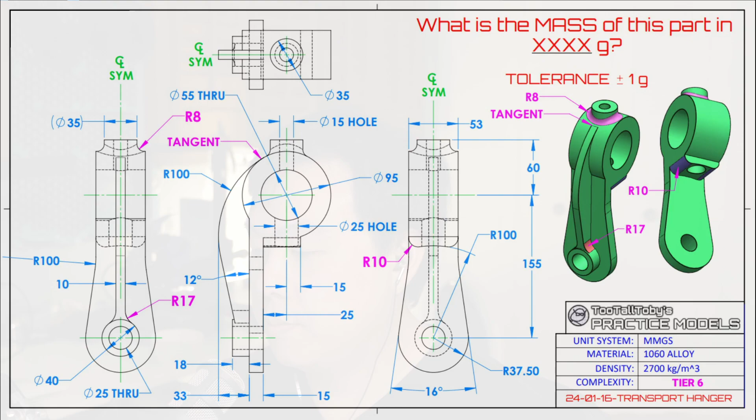Today we'll be modeling Too Tall Toby's 240116, the transport hanger. And like always, we'll take a look at the diagram and decide on a plan before we get started. So let's jump into the diagram.

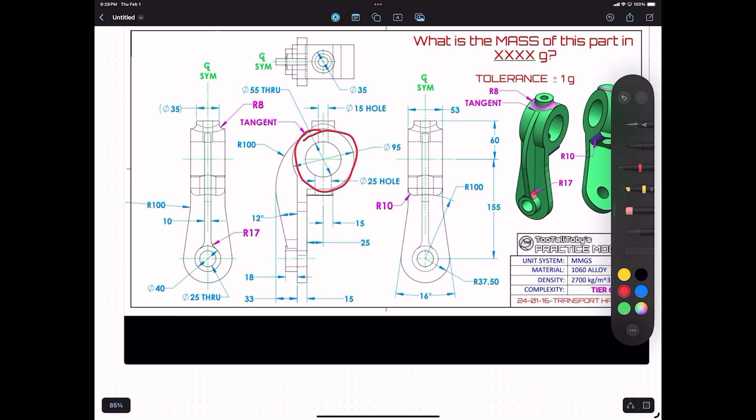So looking at the drawing, basically there are two profiles that we're going to be working with. We're going to be working with a side profile, and then we're going to be working with a front profile. So to start things off, how I did this model is I worked on the side profile and I modeled out this cylindrical shape. Afterwards, I would extrude it and then switch to the front profile to model out this bottom piece over here.

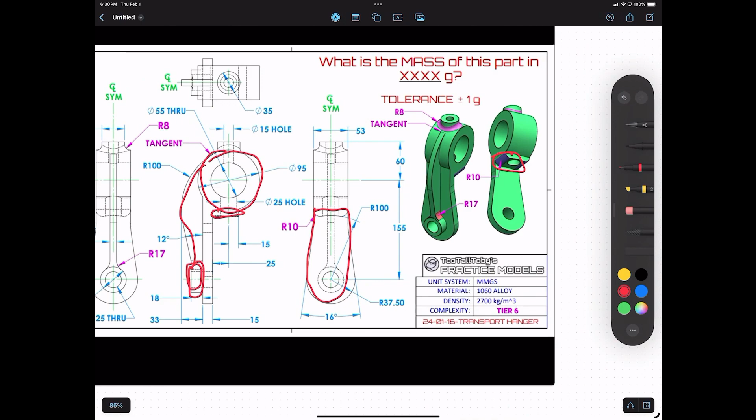Next, I would then model out this cylinder piece with the hole. Then I would do the fin. Afterwards, I would model out this chin from the front. So like over here, this chin over here. Then I would do the top, and then the hole through the top, and then similarly a hole through this piece over here. And that's pretty much the approach that I took to model this piece.

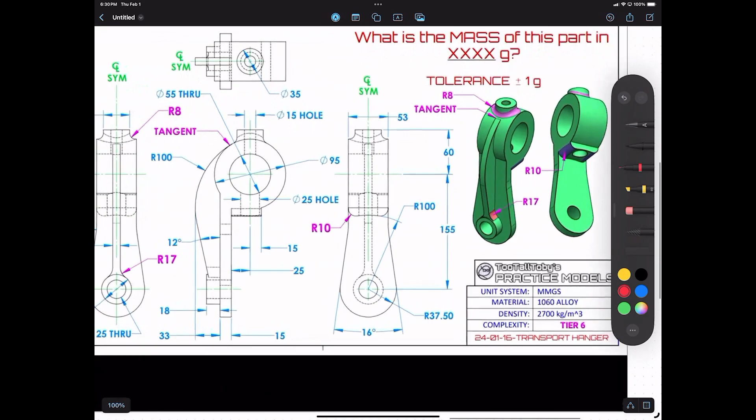One thing to note, however, it's pretty important to figure out what the origin will be. And so for this model, I used this circle over here, this point over here, as the point of origin, because if you can see from the drawing, there's a lot of things that are relative to this origin. So here you can see that there's a 60 millimeter offset relative to that origin, and then there's also this 155 millimeter offset that's also relative to the origin. So yeah, without further ado, let's get started in the software.

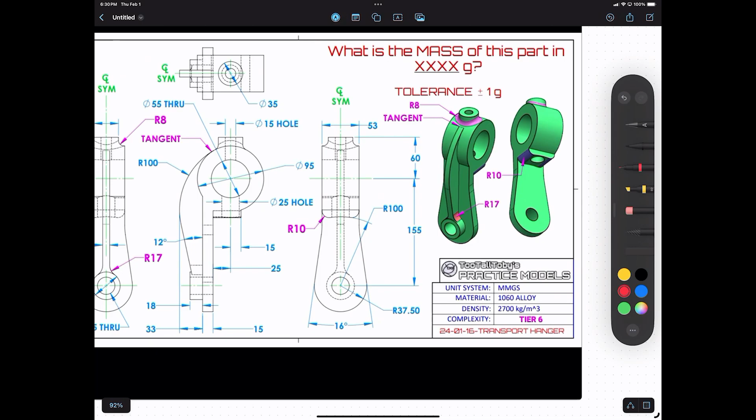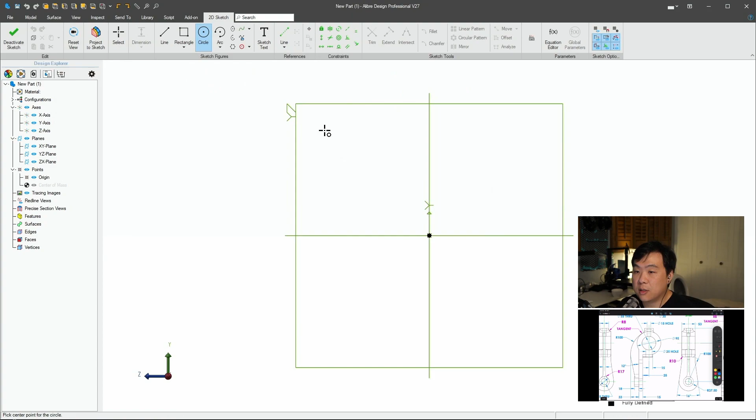So in Alibre, like I mentioned, the first thing I'm going to do is switch to the side profile. So I'm going to rotate the camera to the right. I'm going to create a new sketch on this YZ plane. For the circle, I'm going to use this circle tool. And from the origin, it says that there's a diameter of 95. So I'm going to enter in 95. And there's also this 55 millimeter through hole. So I'm going to use the circle tool again. And from the center, I click and then enter in 55. And I'm done with my sketch.

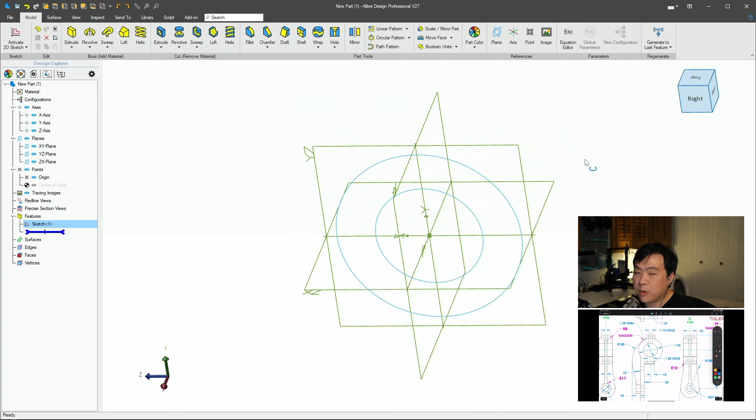From here, I'll go to the extrude tool. And for the type, I'm going to select mid-plane. And I'm going to enter in 53 as the depth and click OK.

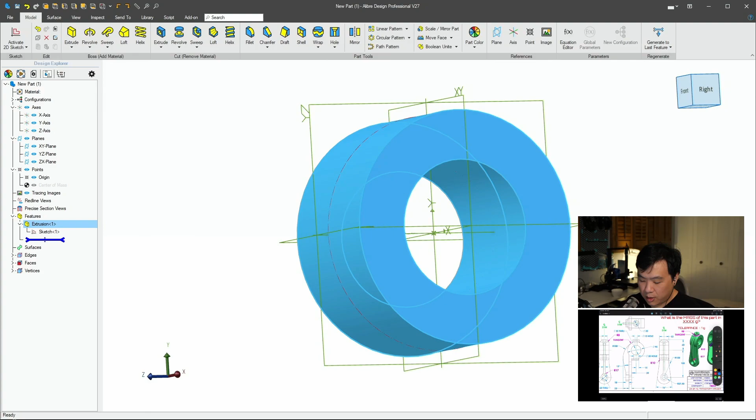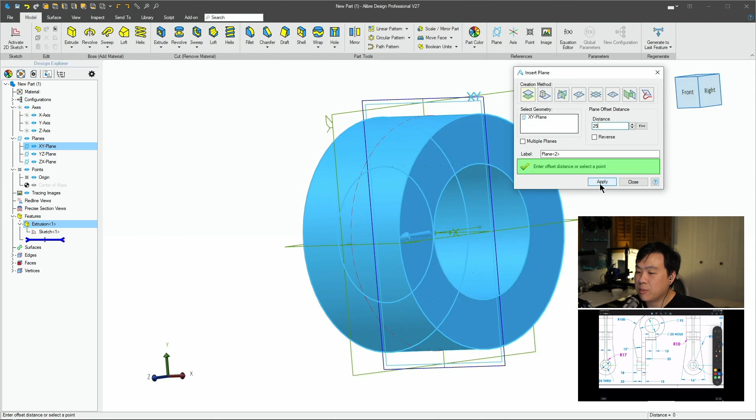Next thing that I'll do is I'm going to model things from the front view. But in order to do that, we need to create a plane that is offset to the correct position to model that piece. So here I'm going to use the plane tool. And for insert a plane, I am going to select the XY plane to be relative off of. And for the distance, I'm going to enter in 25 and then press apply. I'm going to close out of that, and now I can create a sketch on this plane. So from here, first thing I'm going to do is project this face, create a reference figure, and maintain association. So that's something for me to reference.

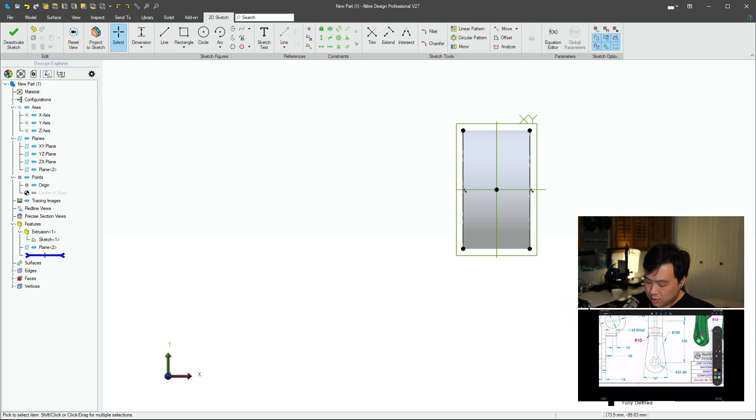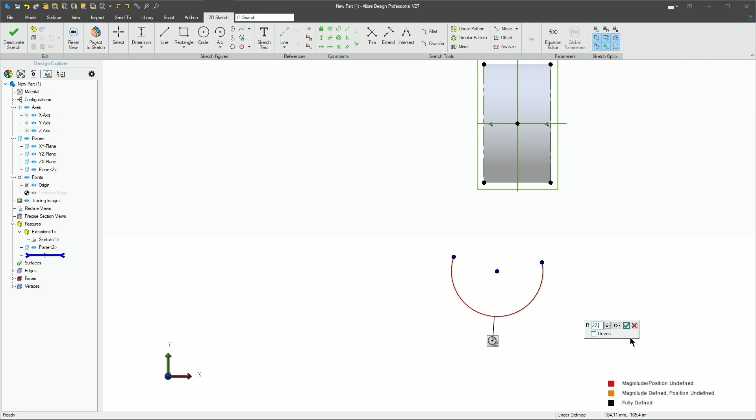And here, from the front profile, I need to create an arc. So here it says there's an arc with a radius of 37.5. So using the arc tool, I'm just going to select anywhere for now, create that arc first, and then add the dimensions in. So I'm going to use the dimension tool. For the radius, I'm going to specify 37.5. I'm going to make it so it is vertically aligned with the center of the existing model. So using the vertical constraint, I click on the center over there and then the center of our arc, and now it's vertically aligned.

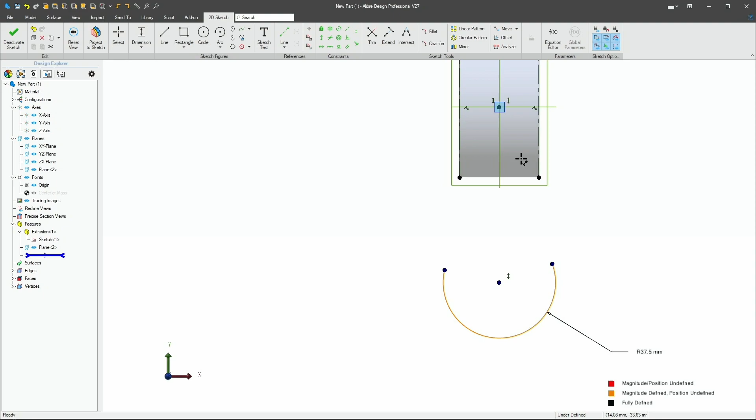Actually, before I draw, I can also add the distance between the center of the existing piece to the center of this arc. So using the dimension command, I click on those two centers, and add in 155 millimeters as the distance. Now I'm actually going to go in and draw in the remaining shape. So using the line tool, I can click on one side, click over here, and then notice how it goes up.

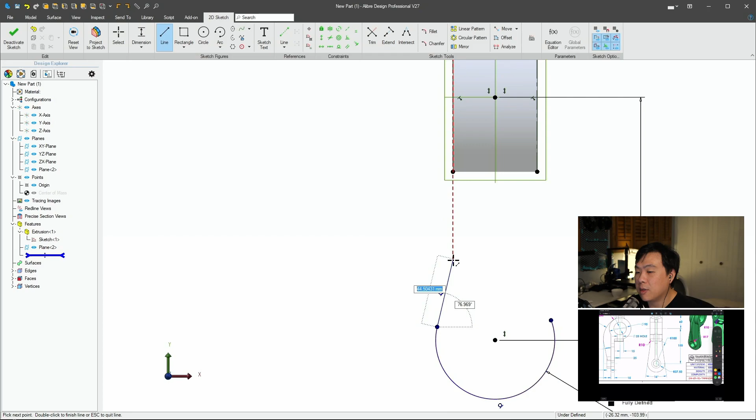I will add the tangent constraint in a bit, or if I'm careful enough, you can see that on the screen there's already a tangent constraint that's added for me if I'm careful with the way I'm drawing things. With the line tool, if I'm careful enough, it automatically adds that tangent constraint for me, which is what I want. You can see it's adding the tangent constraint, but then it also gives me this dotted line.

This automatically shows that if I add the point here, it will be right at the intersection at which a vertical line can be drawn to the existing model, and it will be exactly vertical, which is what I want. So I want the tangent constraint as well as this dotted line to appear. I'm gonna click on that once.

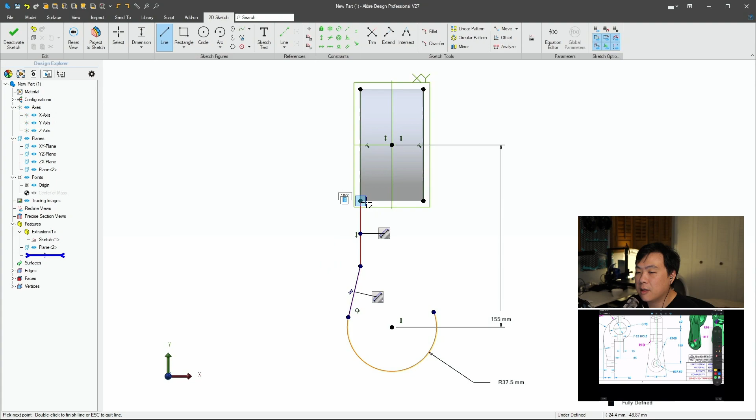I can draw up to this point over here and click again, go across, go back down, and if I'm careful enough, I can make it so, let's see. It's okay. Make sure that it's parallel, and then I can draw to this to complete the sketch. So using the horizontal constraint, we want to make sure things are mirrored. So I'm going to select this left side and this right side, make sure they're horizontal, and then using the tangent constraint, I'm going to select the curve and then the line, make sure they're tangent.

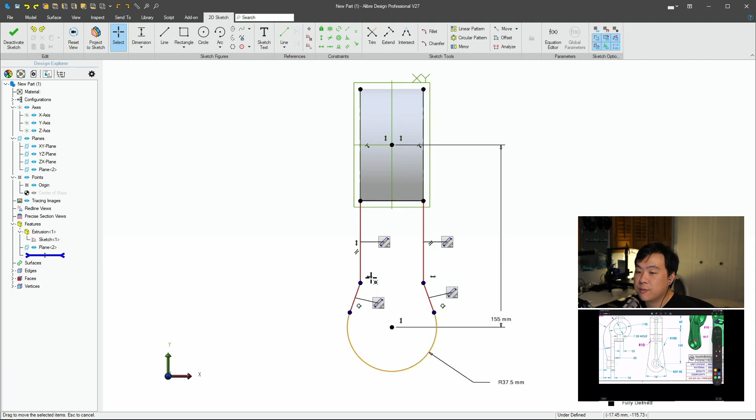And let's see what else is there to do. To make sure that the curves are symmetrical, I'm going to undo that again. I'm going to use the horizontal constraint, click on one point of the curve and click on the other. Oh, it's already over-constrained. Let's see what else can move right now. So it looks like the distance of this line can move, and that's because we haven't specified the angle between the two lines over here.

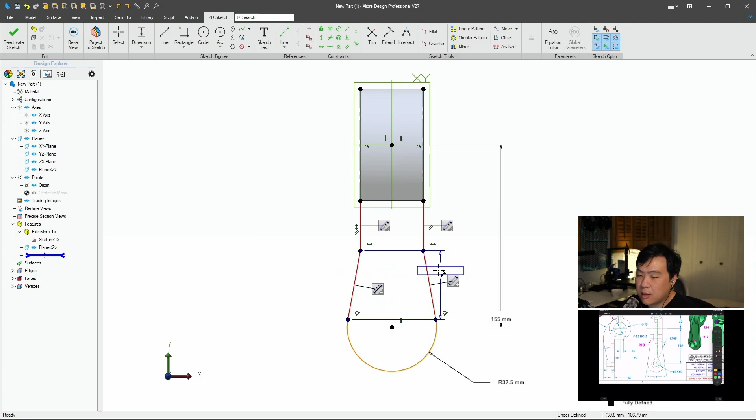So using the dimension tool, I click on one line and then click on the other. Try that again, click on one line, then click on the other. And I can specify that 16-degree angle that's needed, and now everything is fully constrained. So if I deactivate the sketch, I can now extrude. For the depth, according to the drawing, it's going to be 15 millimeters. Click OK.

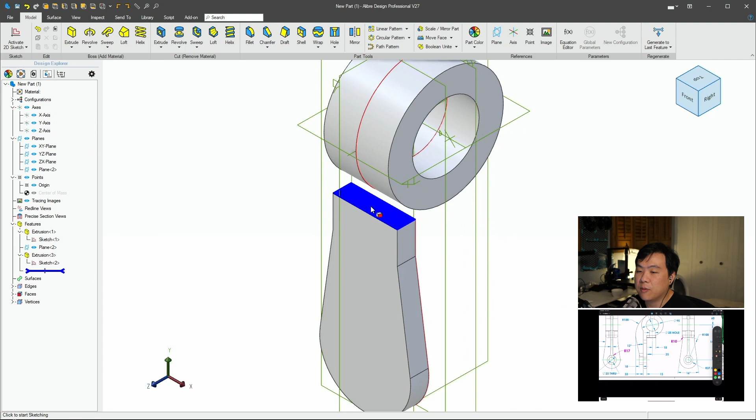Now, the two solids are kind of disjoint right now. So in order to connect the two, I'm going to create a new sketch on top of this face of the second piece that we created. And I'm going to rotate around. I'm going to use the project to sketch and project that face. I want to keep everything from that face, so I'm just going to use the create sketch figure option and maintain association with source entity.

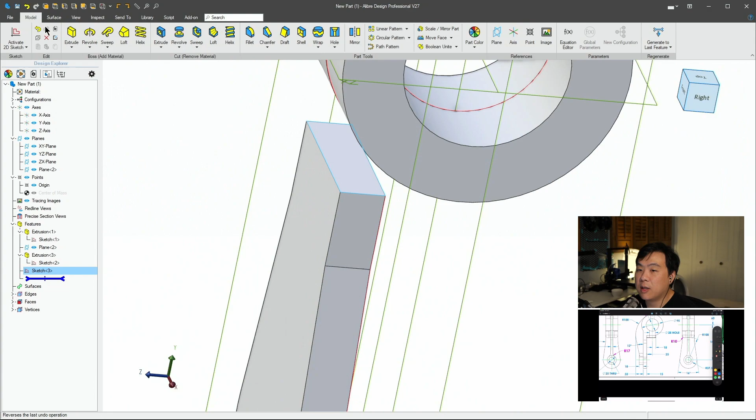And then right away I can deactivate the sketch and use the extrude command. With extrude, I can change the type to geometry and then select the piece that I wanted to extrude to, and then click OK. Perfect. Now, rotating over onto this side, we're going to create that cylinder with the hole. So I'm going to create another sketch on this face now.

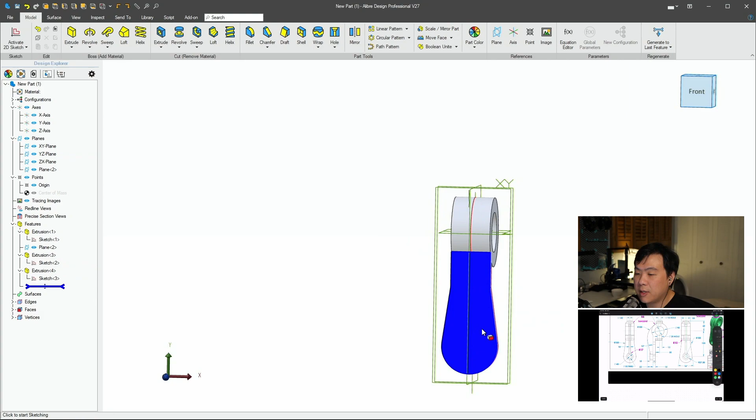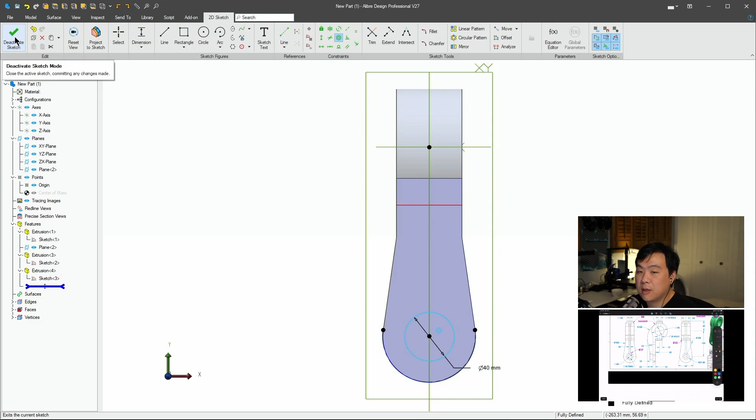And then here, I'm just going to use the circle tool to create a circle and specify the diameter of 40. I'm now going to use the concentric constraint so that the center of this arc over here and the center of this circle are the same. Selecting the concentric constraint, I click on this arc and then click on the circle that we created, and now it's fully defined. I can now deactivate the sketch, use the extrude tool, and specify 18 millimeters as the depth.

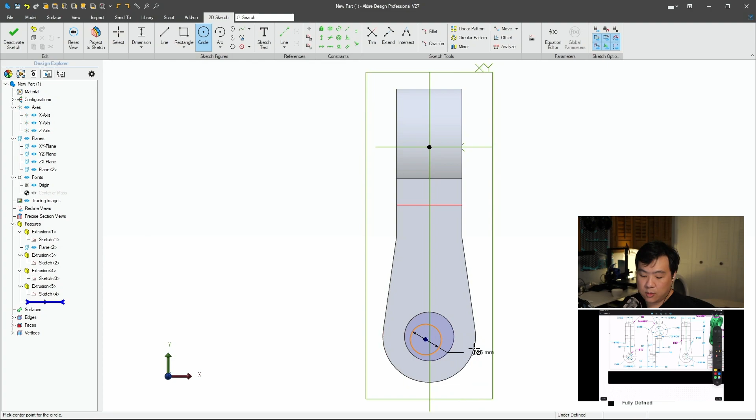Now creating another sketch on top of this new face, I can use the circle tool again and specify the hole that we want is 25 millimeters. Once again, using the concentric constraint, click on the circle, click on the outer circle, and now that it's aligned, I'm going to deactivate the sketch, and then use an extrude cut and select the type to be through all. Click OK.

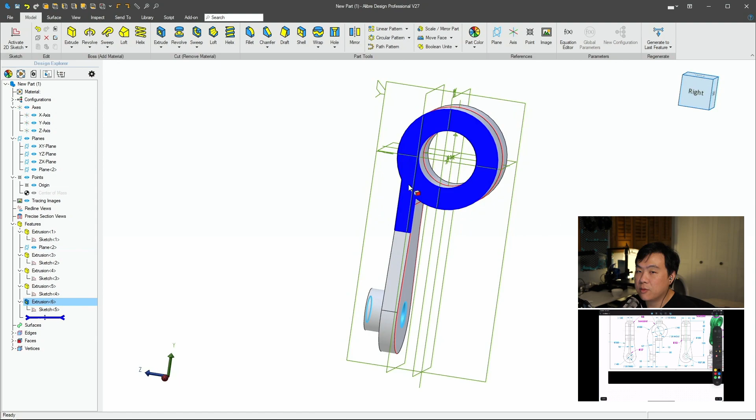Next thing I'm going to do is I'm going to model this fin. So in order to do that, I'm going to go back into a side profile. So I'm going to create a sketch on top of this YZ plane, and that'll bring me to the side profile. And I'm going to project in a couple of things that I need to reference.

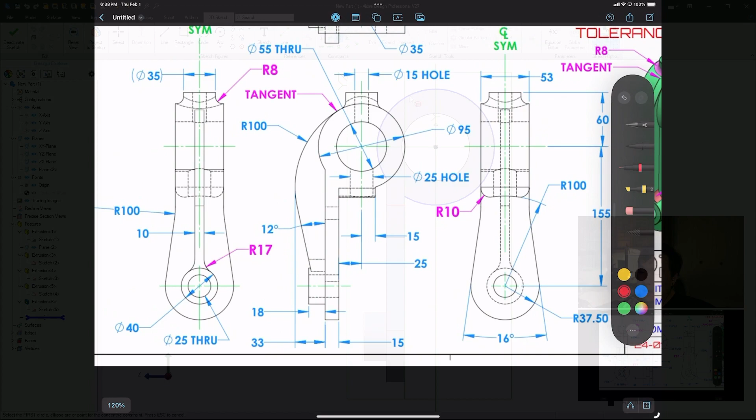So from the drawing, it says that I will need an arc, and that arc needs to be tangent to this outer circle. And likewise, it also gives me another dimension where from, I guess, the bottom of this, let's just call it leg, there is a 33 millimeter distance to a line that runs vertically, and that vertical line is just going to be a reference line, but our arc needs to be tangent to that as well. So that's what we'll do.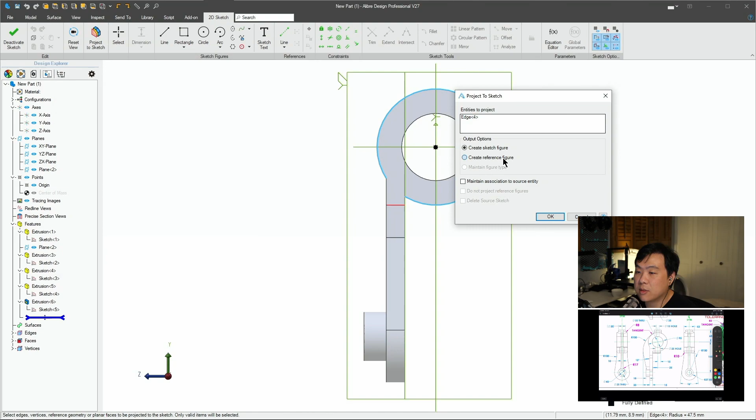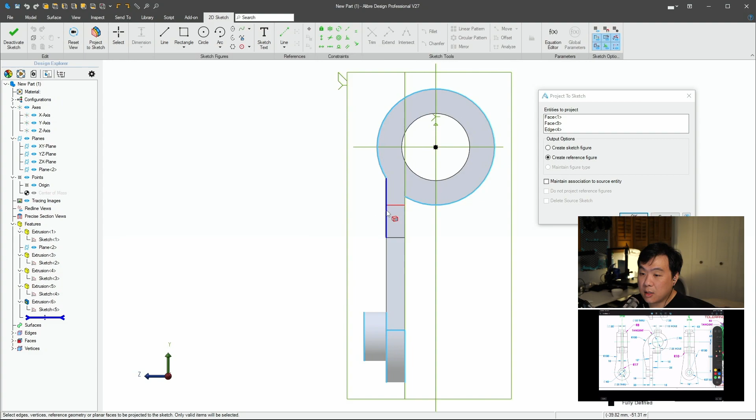So I'm going to use project to sketch. I'm going to project this curve that we need, and again, I want it to create reference figures. We know that we need this face because we need to create a reference line that's 33 millimeters away. So we'll select that face. Let's see. We probably will need this face as well because the arc needs to intersect with the cylinder. That might be all that we need.

But let's also project in these two edges so that when we close off the profile, we can make sure that it's aligned to these two edges. And then we want to maintain association and then click OK.

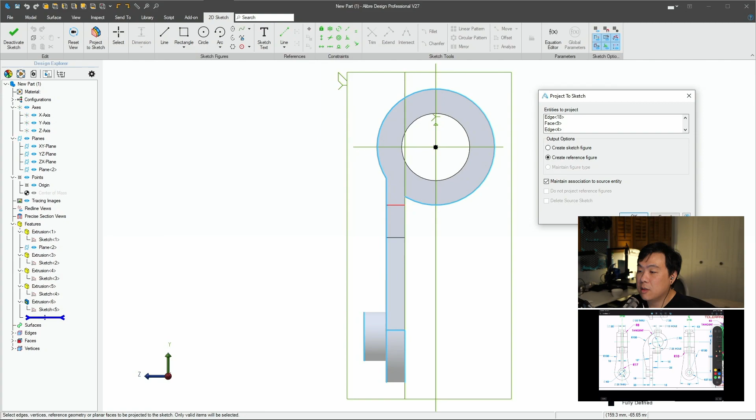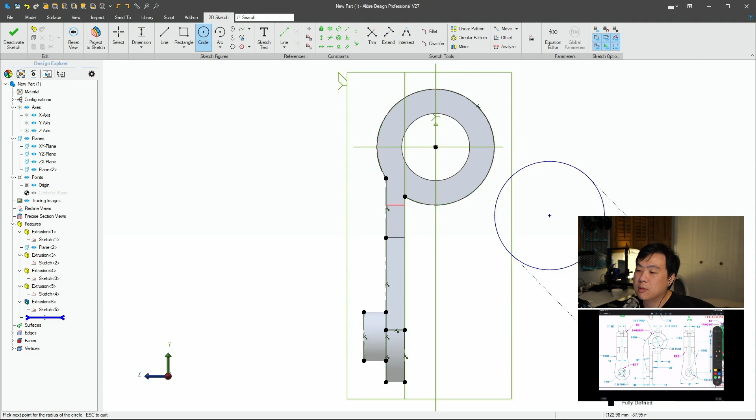So there's two ways to do this arc. We can actually use the arc tool, or I'm going to use a circle. I found that the circle works better. So I'm just going to create a circle first. And it says that the radius of this arc is 100, which means that the diameter of the circle must be 200. I'm going to specify 200 and click OK. Now using the tangent constraint, I'm going to click on the circle and then click on the curve that we projected in. And now it's aligned over here.

Now using the line tool, from the bottom of this, let's call it leg, I'm going to drag it outwards, and enter, making sure it's 180 degrees, and enter in 33 millimeters as the offset. Oops. Pressed the wrong button. Sorry. Let me do that again. 33 millimeters, and make sure this is 180, and then press OK. And get out of that.

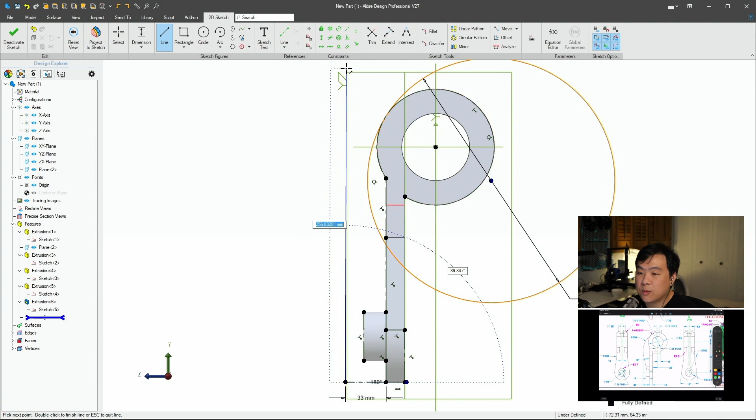So here, I'm just going to right-click on this line and then convert to reference figure. I'm going to draw another line that's vertically upwards, making sure that the degree is 90. I'm just going to draw arbitrary length, tab over, making sure it's 90, and then press Enter to confirm, and then Escape to get out of that, and then also right-click on this line and convert it to reference figure. So now going with the tangent constraint again, I'm going to click on the circle and then click on this reference line that we created.

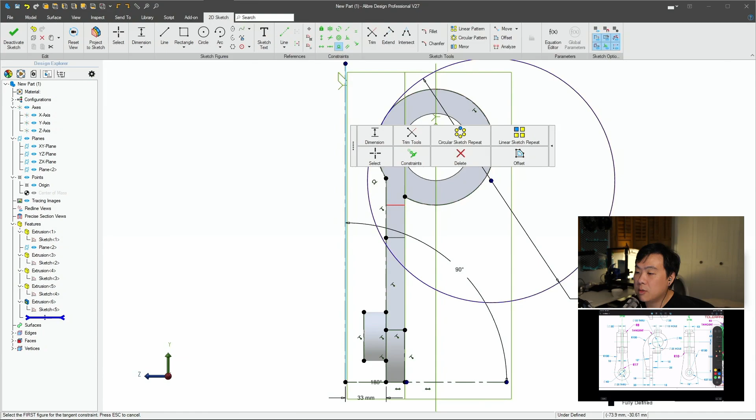And it says unable to determine. Let me see. Why is that? 33 millimeters. Can I move this around? It's tangent to this curve. Why isn't it allowing me to? There we go. So I must have clicked on the axis or the plane instead of the line. But now I applied the tangent constraint to the circle and then also this line. And now notice that the circle is fully constrained.

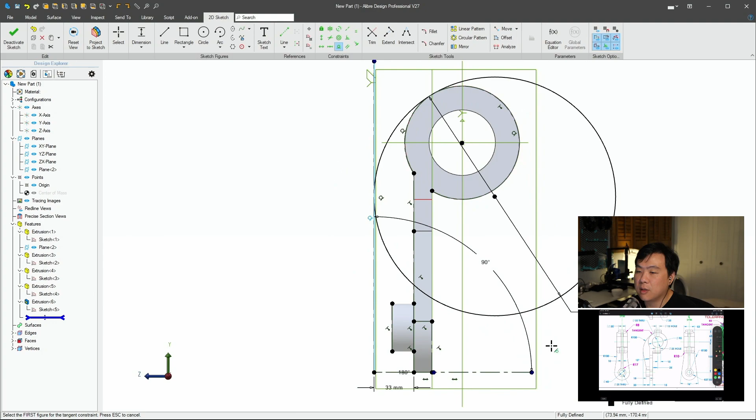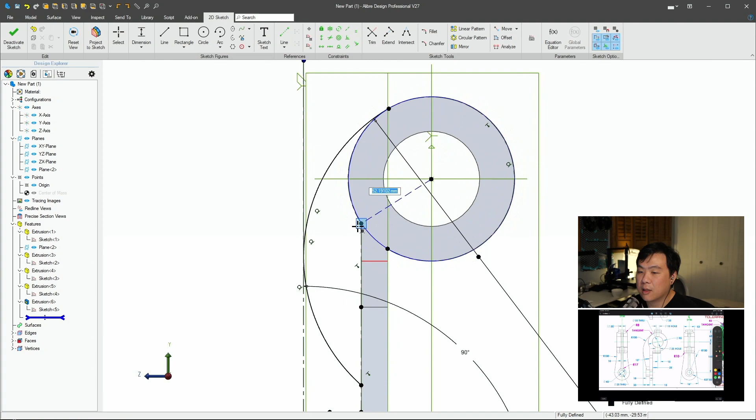I can now use the trim tool and I can trim away this edge. And notice that it's still fully defined, which is what we want. Now, in order to extrude, we actually need to close off this profile. So I'm just going to draw an arc that connects these 2 points and then draw a line all the way down here. That would be close to where we need. So using the arc tool, I'm going to select the center over here. Click on this existing point, click on this existing point, and now we have an arc over there.

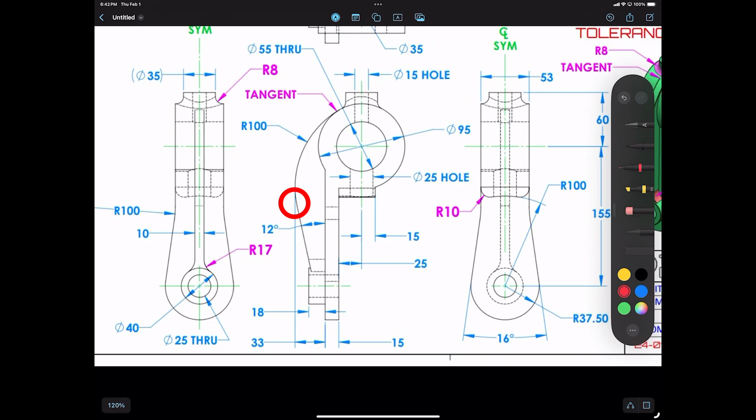Actually, right now this circle touches this line, but really we need another line that comes off of this arc that then touches the cylinder on this face. So let's just do that now. So I'm going to use the line tool. I'm just going to draw in a line somewhere, and for now, let's just make it horizontal to the existing points on that cylinder. So I'm going to do that.

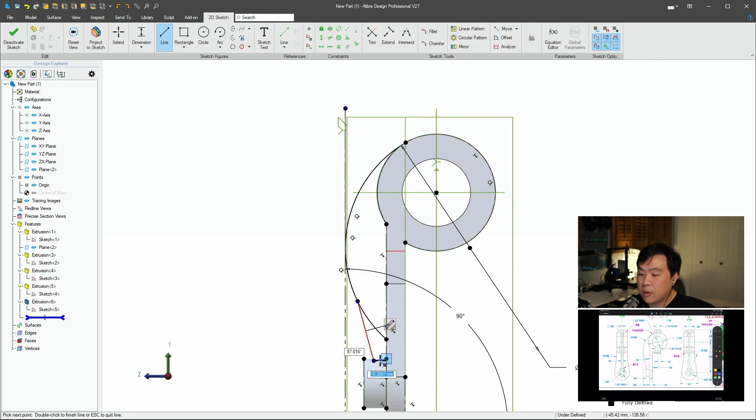And then I'm going to come over here, and it'll connect to an existing point over here. And then I'm going to go all the way up to where we close that arc. And then that should be a fully closed sketch. Using the trim tool, I'm going to trim away this extra piece from the arc that we don't need anymore. So now I will need to redefine some of this stuff. So just using the dimension, I'm going to click on this arc again, and again specify, let's see.

Something is still able to move. But actually, let's add the other constraints first, and maybe that will get rid of this orange position undefined, not error, but warning. So we know that this line needs to be tangent to this arc. So I'm using the tangent constraint. I'm going to select this line and this arc, and that's done.

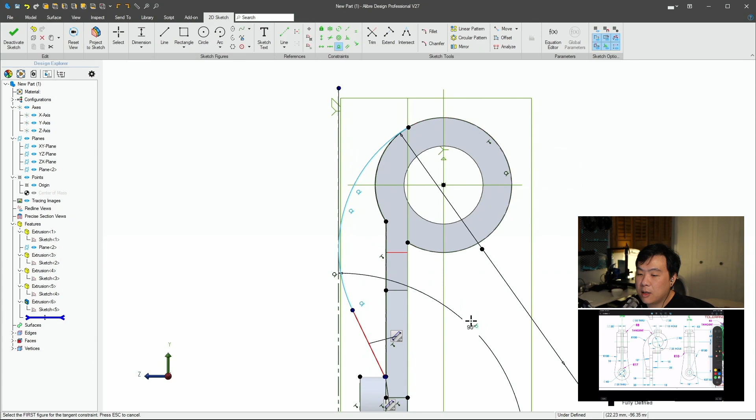Using the selection, I'm going to move this point. Let's see. What is it doing over here? So I can move this point. Let's just make a horizontal constraint between these two existing points. So I'm going to use the horizontal constraint, select this point, and then select this other point over here to make it horizontal. I'm going to use the dimension tool to add that 12-degree angle. So pressing on this line, pressing on this existing line, and then adding 12 degrees.

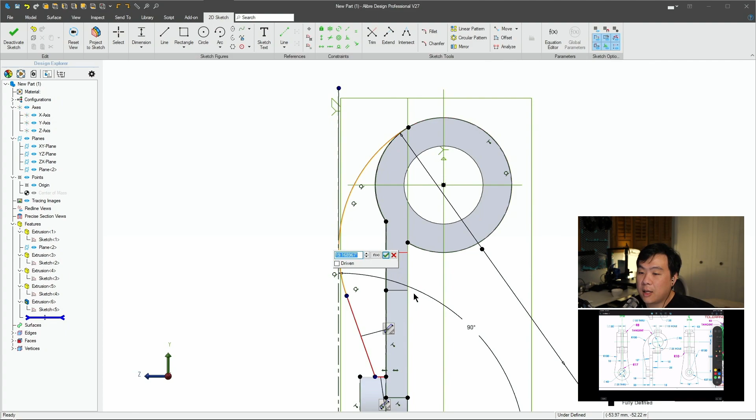And yeah, so now my sketch is fully defined. And that's exactly what we want. So we can now deactivate the sketch or rotate over here. I'm going to select the extrude command, and I want to specify the type to mid-plane, and then I want to specify the depth, in accordance to the drawing, is 10. So I'm going to enter that.

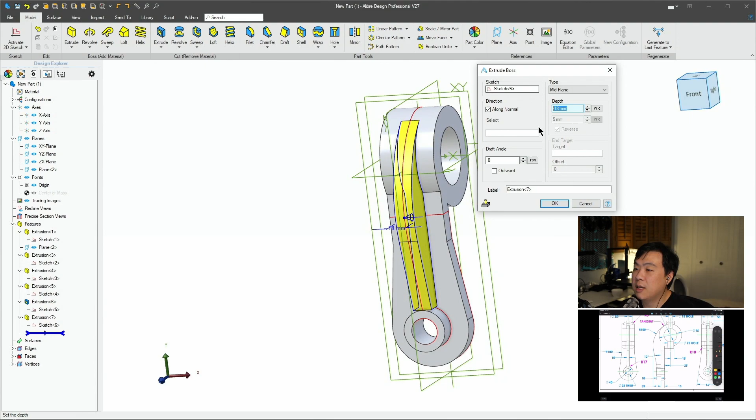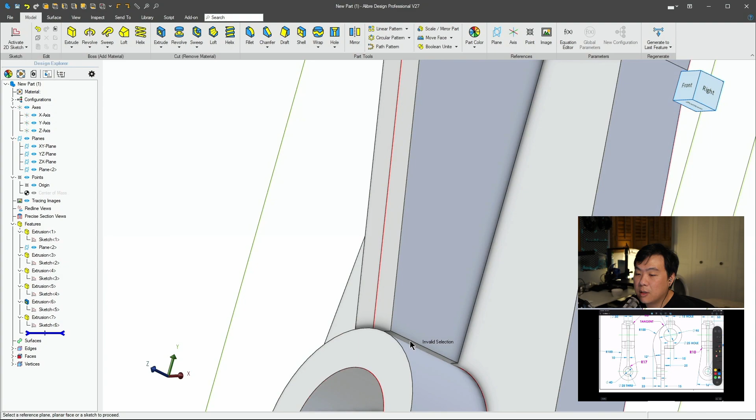Now, this kind of looks okay, but one issue is that if you zoom in really close, we can see that it's tangent to this circle, but it's not fully touching. So in order for it to fully touch, I'm going to create another sketch on top of this face over here and just extrude it out a little bit more. So I'm going to create a sketch, select this, zoom in so I can select this face. And here I am on this face.

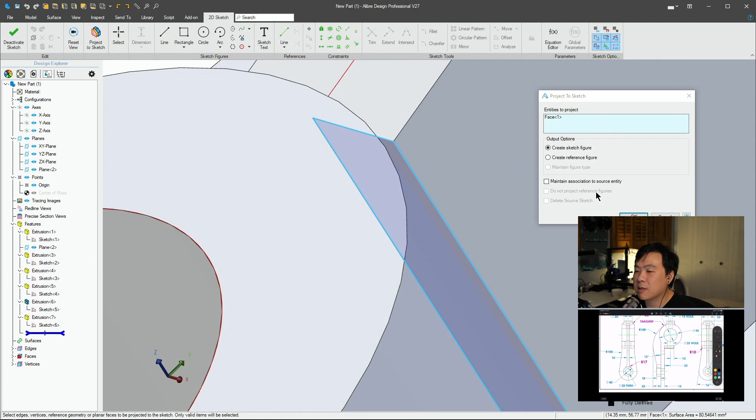And now I'm going to project in that face. So spin back around, rotate the camera. I want to project in, if I can get close enough, this face over here. And I do want the sketch figure because I am going to use these lines to extrude. I want to maintain association and click OK. I'm going to press reset view to get me back to this view.

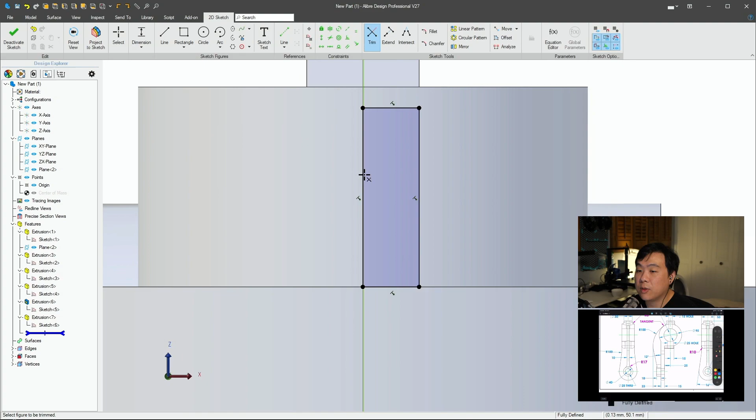Now, because the face is only visible on one side, we want to mirror this face onto the other side of this axis as well, so it covers both sides. So I'm going to use the trim tool. I'm going to trim away this middle line because we don't need that. Can I do that? Let's see. Why isn't it letting me do that? Let me reset the view.

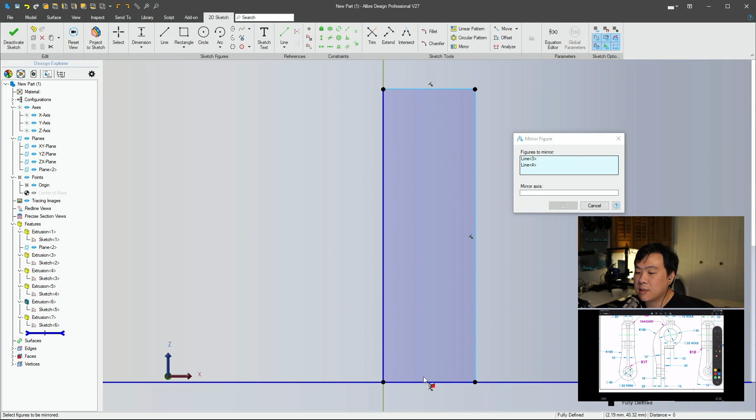Or actually, I can just select this edge over here in the middle. I can right click and then click delete. Oh yeah, it's deleted. So now I can just use the mirror tool and select these two edges over here, this one and this one, and this bottom one over here as well. And I want to mirror it across. So selecting mirror axis, I want to mirror it across this Z axis, and then click OK.

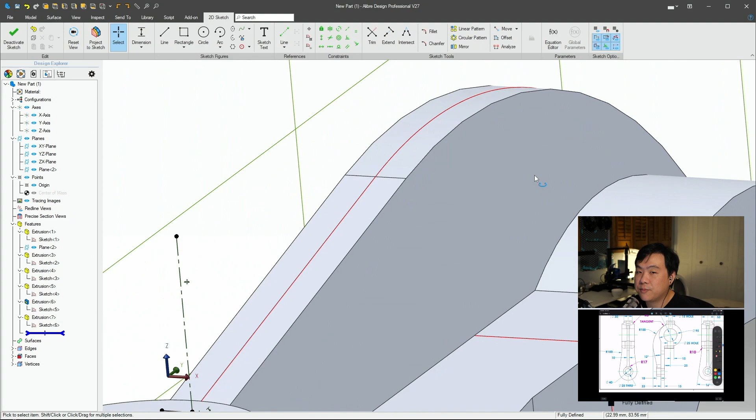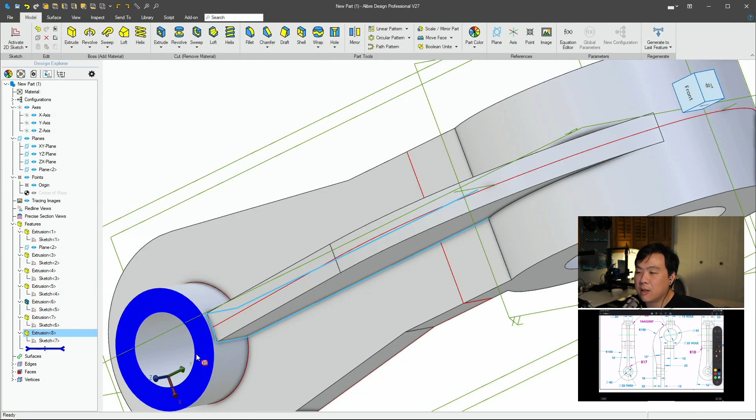Everything's still fully defined, but now I have that rectangular profile that I can use to extrude into the cylinder. So I'm gonna click deactivate sketch. I'm gonna now go to extrude, up to geometry, and select the cylindrical face. I'll click OK. So I know the difference is very minor, but now it's not just a single point that is tangent and touching. It's now this whole face touching this cylinder. And now this fin is complete.

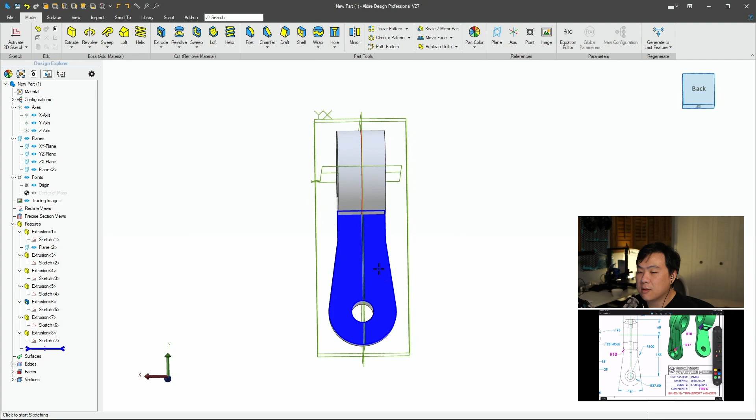Now rotating over here, we're going to create that little chin in the drawing. And here the main dimension is that there is an arc that is 100 millimeters in radius that will be used to define the chin. So let's do that. I'm going to first create a sketch on this face. And I'm going to project in this entire face. And I'm just going to use create reference figure and maintain association.

I'm then going to use the arc tool. And the center of this arc is going to be down here. So I'm going to click over here, and then I'm going to use the existing points.

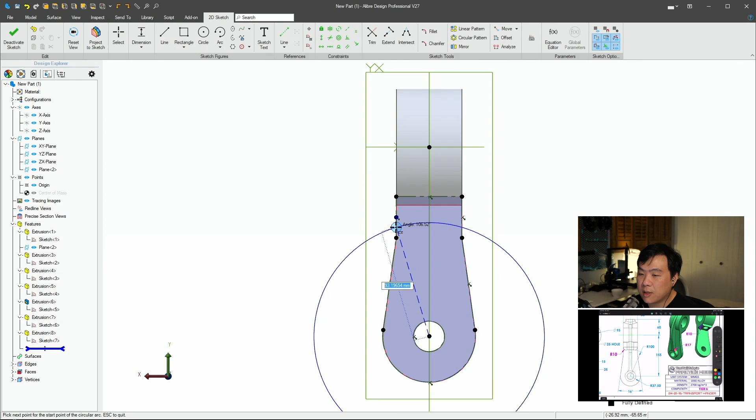Let's see, existing points. I want to make sure there's no auto constraining done because we haven't defined the radius yet, and I don't want it to be coincident to anything existing. So I'm just going to click somewhere over here and then click over here. So it's on the line, but it's not fully defined. I'm going to use the dimension tool, dimension the radius of this, and enter in 100 manually. I'll click OK. So now this arc is fully defined.

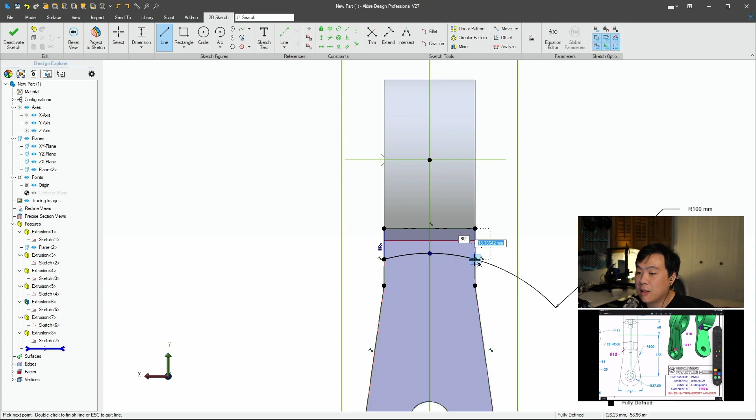And to complete the profile, I'm just going to use the line tool. I'm going to click over here, click on this existing point that we projected in, click on this existing point that we projected in, and then close it off by clicking on the end of this arc. And then we're done, so I can deactivate the sketch now. Everything's fully defined. And now I'm going to use extrude. The amount that we want to extrude is from the drawing: from the back of this face, there's 25 millimeters plus 15 millimeters, so 40 millimeters in total. And then I'm going to click OK.

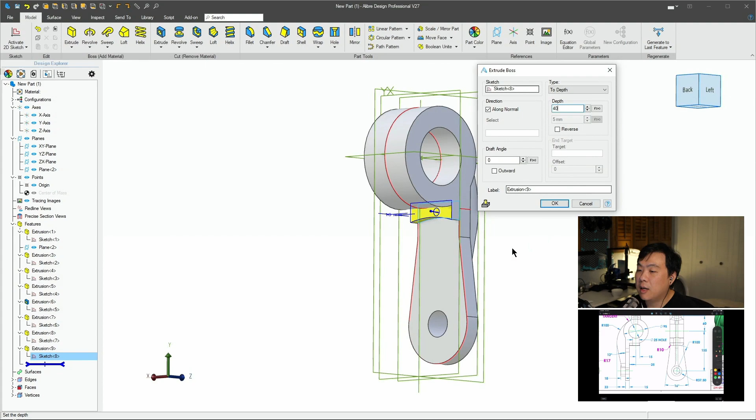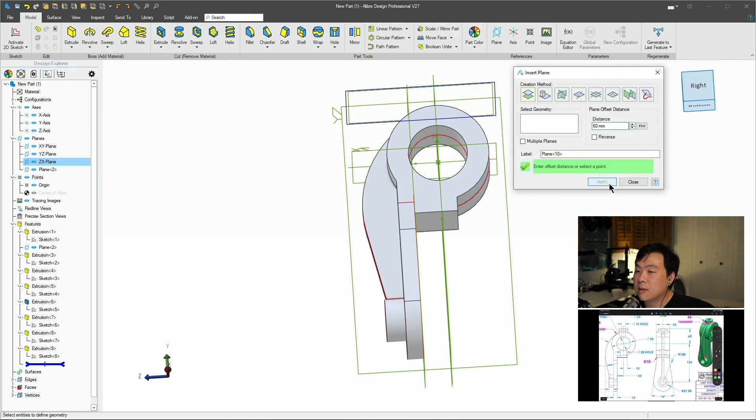All right. So the next thing is creating the cylinder up on the top. In order to do that, I just need to create a plane that is off of this XZ plane. From the drawing, it says that it is 60 millimeters above the origin, so I'm going to enter the distance of 60 and then click apply and close. Now I can create a sketch on top of this plane. Here it gives me the origin over here, so I'm just going to use the origin.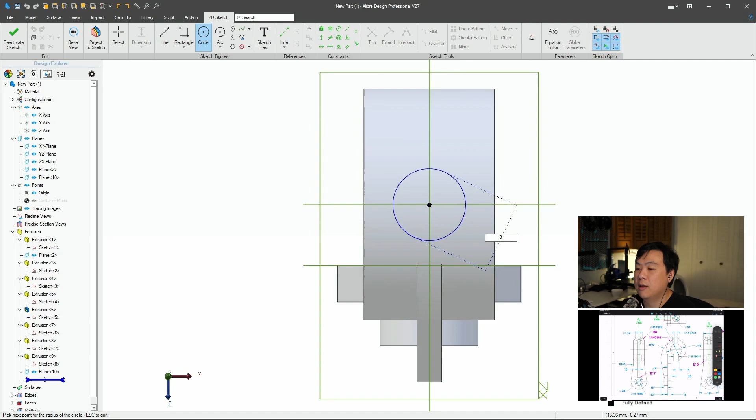I'm going to use the center circle tool, click start from the origin, and enter in the dimension of 35 as the diameter. Then I'm going to deactivate the sketch and click extrude. I'm going to use to geometry, select the top of our model, and then click OK.

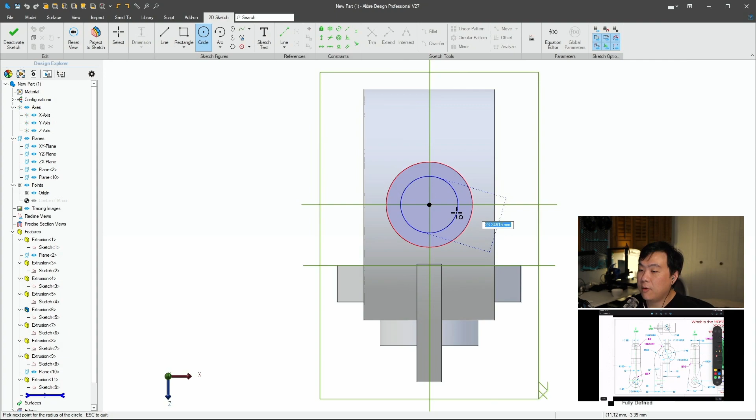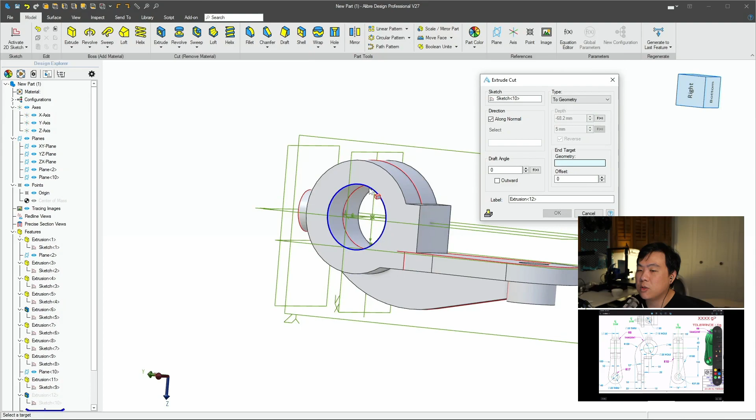Now, with this new face, I'm going to create another sketch on top of this face, use the circle tool again, and enter in the hole that is going to be 15 millimeters, press enter and deactivate the sketch. Now I'm going to do an extrude cut. The depth we can actually do through all, because the hole on the bottom is larger than the 15 millimeter hole here, whichever works. But I'm just going to use to geometry, select this inner face over here, and then click OK.

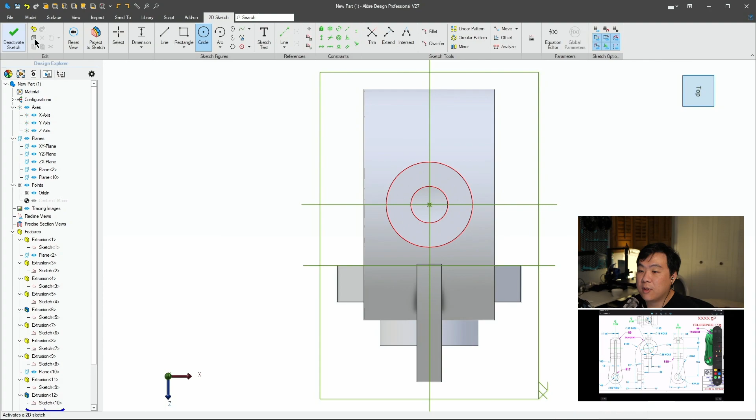Similarly, I'm going to create another sketch on top of this ZX plane, draw in another circle, put in 25 millimeters as the diameter and click OK. I'm going to deactivate the sketch now, so you can see there's the cylinder over here. I'm going to use another extrude cut, use to geometry to the bottom of this chin, and click OK. We're close to being done with the part. We just need to fillet all of the edges.

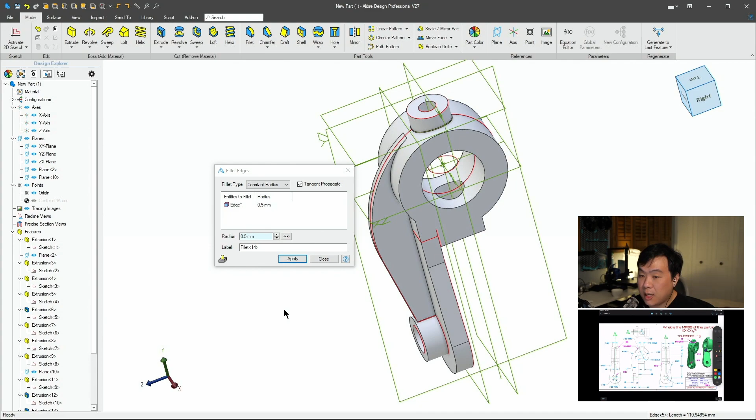Opening up the fillet tool, I'm going to select this top edge of the top cylinder, and it says that the radius of this fillet is 8. So I'm going to enter in 8 and click apply. Then from the chin, there's these 2 edges over here. I'm going to select both of these edges, and the radius for that is 10, so I'm going to enter in 10 and click apply.

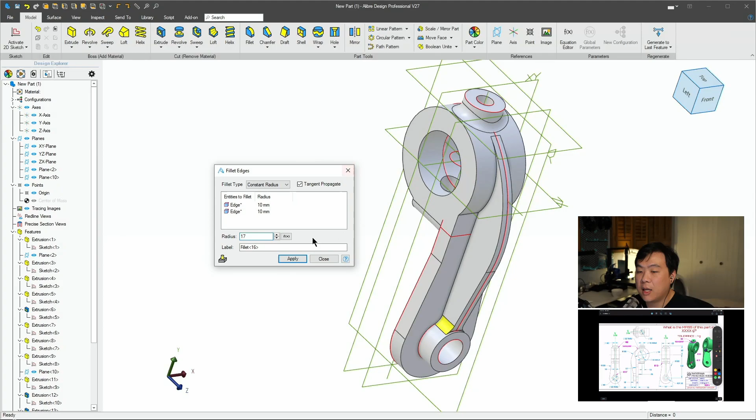Then there's these 2 edges over here by the tail, or this fin. I'm going to select these 2 edges, and the radius for that is 17, so I'm going to enter in 17 and click apply. And lastly, there's this edge over here with a radius of 100. I'm going to select that, select the other side, enter in 100, and click apply. And that is pretty much our model.

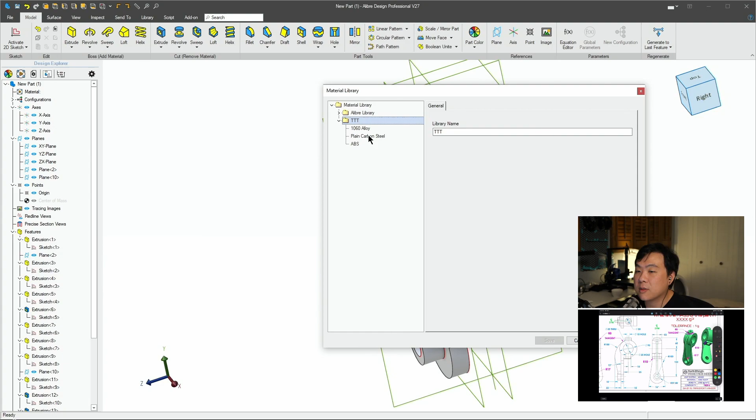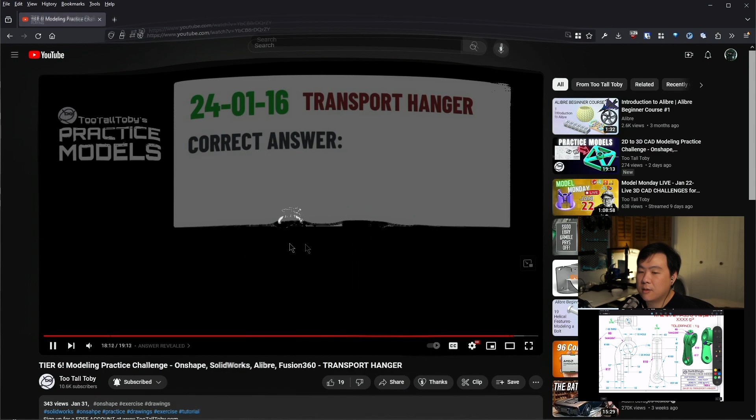To check our work, go to materials on the side, select from library, and we're working with the 1060 alloy. So we're going to select 1060, click apply, go to inspect, physical properties, calculate, and we get the mass of 1,217.0284 grams. And if we go to the video, go to the end, 1,217. And that is it. That is our part.